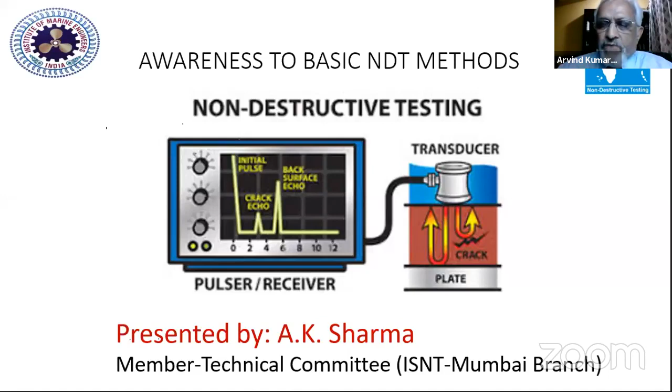As Mr. Jain pointed out, each subject in NDT is a very vast subject. Each method is vast, and everything cannot be covered in such a short time. But what I will be doing is briefly refreshing your minds with basic knowledge about each method, what is already known, and then mention what is generally followed in code as good practice. For each method, I have one slide which is very important, summarizing everything we should remember while inspecting an NDT component, or carrying out a survey or supervising NDT. So with this, I will first start off with the penetrant testing method.

Penetrant testing is the most ignored NDT method, where people think that it's very easy and anybody can perform it, and it's happening also in the industry. If you see, we just want to witness a PT, we don't care about who is doing it and how it is being done. But it is not really so easy. You have to follow certain critical steps, and if you don't follow those, you are likely to miss defects.

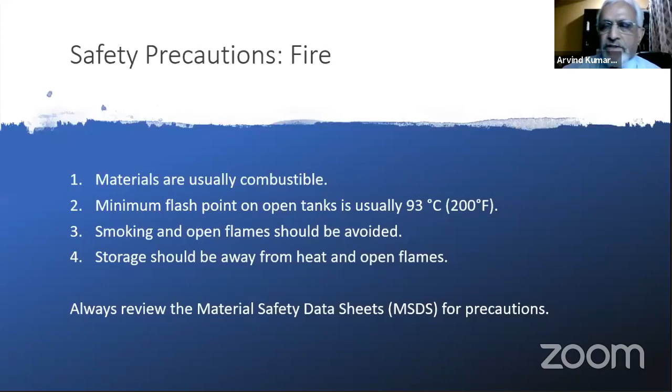Now, the penetrant testing materials which are used are mainly very combustible materials, and one needs to take care about their storage and handling, because if they are open to smoke and flames, they are likely to catch fire. So it is always better to review the material safety data sheets of the materials, and as a precautionary measure, follow all the instructions with respect to the storage and handling of these materials.

It has got a penetrant kit which contains a cleaner, a penetrant which is a dye, and a developer. This technique is normally applied to detect surface and subsurface defects, and the subsurface defect should be open to the surface. If it is not open to the surface, then you will not get any indication in penetrant testing. That is one of the things you have to keep in mind always.

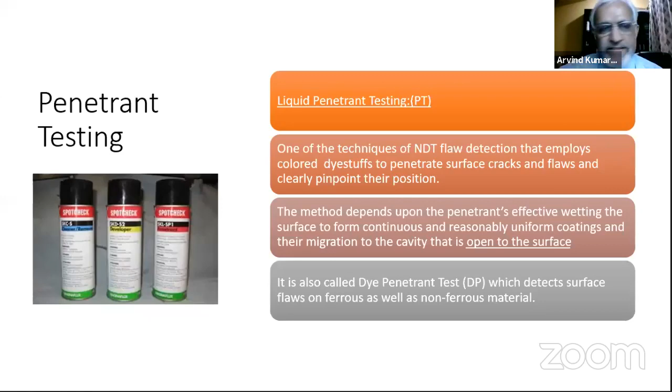This is also widely known as a dye penetrant test or a liquid penetrant test, but in ASNT terminology, we call it penetrant testing. Now it has got 5 basic steps, as you can see, and I will explain.

The first one is that we need to clean the surface. Cleaning has to be very, very proper to ensure that all the dust and oil and foreign material is removed, and the cavity which we are expecting to be a defect should be very clean.

After cleaning is done thoroughly, then you have to apply the dye, which we call the penetrant. This has to be applied using various methods, which we'll be seeing in other slides. Once the dye is applied, you have to hold for some time, what we call the penetrant dwell time. Dwell time is the time where we allow that dye to enter the surface of the cavity or crack or whatever defect we expect.

Once it has entered the entire cavity, we remove the excess penetrant. The next step is removal of the excess penetrant which is there on the surface of the test you are conducting, whether weld or other surface. Again, this requires a bit of technique. Otherwise, if it's not done properly, there are chances you might remove the entire cavity's penetrant which has gone inside the material. If you do it rigorously over a longer period than required, you will be removing all the penetrant that was there in the defect.

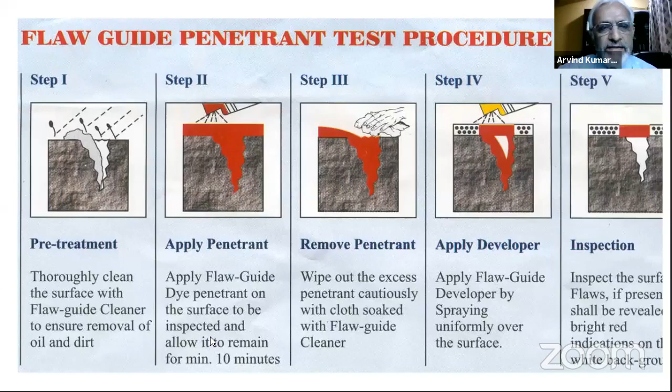So these are the basic 5 steps. Now we'll see a subsequent slide on what is important and what we tend to miss out in this.

Before we do that, we will see certain techniques that penetrant testing can be applied. One is the visible method, which is simple - we are not using any fluorescent lamp or anything to detect the indication. After the penetrant is applied, we check it with the naked eye, or once in a while a magnifying glass, not very high magnification, maybe 20x or so. That indication is called the visible solvent penetrant process.

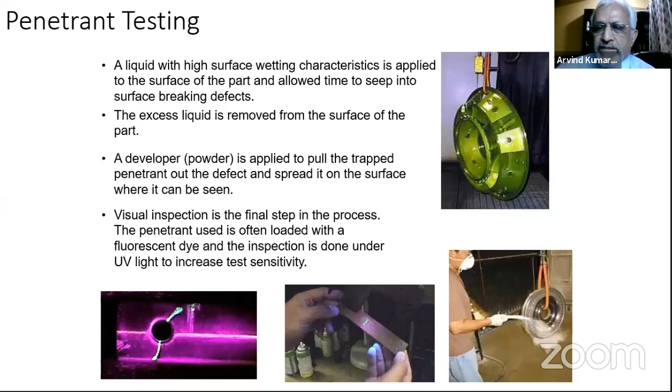Whereas the other one is fluorescent penetrant. What you see in this slide is a fluorescent technique where you have a penetrant which will have fluorescence, and the indication, if seen under UV light, will glow and fluoresce. This technique is generally applied on machined components and where sensitivity requirements are high, where you are expecting tight fatigue cracks and such defects. There we go for a more sensitive method, which is fluorescent dye penetrant testing.

So this we have seen now for penetrant testing what is required. We need to clean the surface, apply the penetrant, then the solvent, clean the excess penetrant and apply the developer and carry out the interpretation.

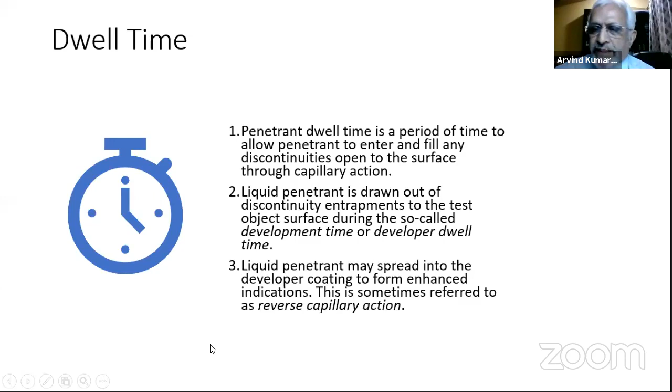Now dwell time is important - both penetrant dwell time as well as developer dwell time. Penetrant dwell time is generally for wrought materials specified as 10 minutes, but for other materials like castings it could be 5 minutes. For each material, section 5 gives you what dwell times are required, but generally it is 10 minutes and 5 minutes. For our application, most of the time it is 10 minutes. Similarly, dwell time of developer is also 10 minutes minimum, and then you can do the interpretation up to 1 hour as per section 5.

Now, as I was saying, you can apply the penetrant in a number of ways - by spraying. Spraying is generally what the kit I had shown in the previous slides uses; we have aerosol cans where you can spray the penetrant. Or it can also be applied by brushing, pouring, or dipping.

The important thing to understand is that whatever method or procedure we have followed as a documented and approved procedure, the same procedure we need to follow in subsequent tests that we do. If I have approved a procedure where spraying is used, then I should follow that only during my penetrant testing. If I change these variables, I have to prove again that what I'm doing is correct and I'm able to detect the defects I'm supposed to pick up.

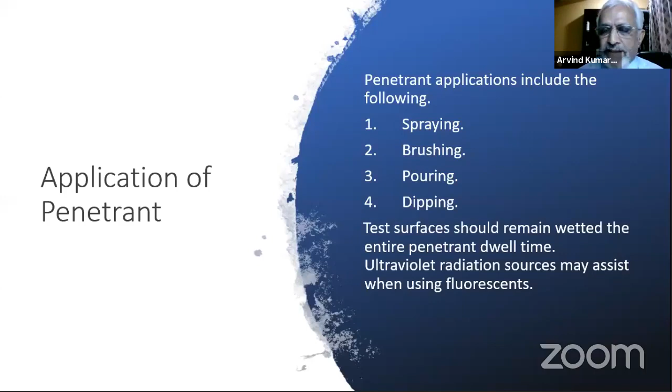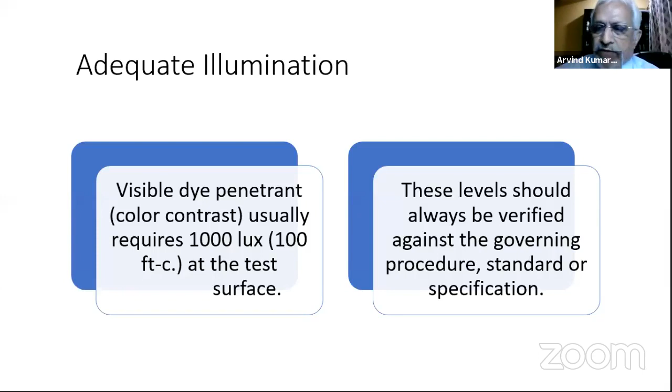Now for the fluorescent method, you need to have a UV light and the lux meter - or rather, a black light meter, which will measure the quantity of UV light intensity. When you're doing a fluorescent test, apart from 1000 microwatts per centimeter square UV light intensity, it is also important to make sure there is no leakage of white light from any of the darkened area that you have made for doing fluorescent MPI or fluorescent PT.

So leakage up to 20 lux is permitted as per the code. If the leakage of white light, that is normal light, is more, then you have to prevent and take care of that leakage light.

This is how you check. Generally, when doing a penetrant examination, you're supposed to measure 1000 lux. Now, everybody may not have a lux meter with them, so what the codes specify is that at least you should be able to once measure the intensity of the light you're having for carrying out the PT examination, and keep that as a record of measurement available with you at all times. If anybody suspects anytime, you have the measurement.

And how you do that is, suppose you have a say 30 watt or 40 watt bulb kept at a meter distance. There you hire a lux meter and check the intensity. If you're getting minimum 1000 lux, then you know that by using a 30 watt bulb at 1 meter distance, you're able to get the minimum lighting required. So you have it established in your file, and then you can carry out the PT examination accordingly - you don't have to use a lux meter every time.

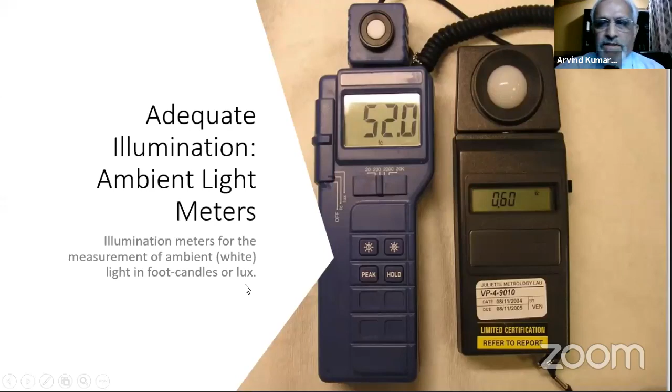So this is the meter which will check the white light intensity it will give. Now the interpretation and evaluation.

The interpretation is first you have to see what indications you have got, whether it is a relevant indication or a non-relevant indication. That means it is really coming from a defect, or it is coming from the process that you have not carried out properly. It is because of that.

So evaluation would be once you have established that yes, it is a relevant indication, then you have to evaluate it against your acceptance norms or whatever code you are following, whether that relevant indication is meeting your requirement or not. Most codes, at least for penetrant testing and magnetic particle testing, will not accept any linear indication. Rounded indications like porosities and all have acceptance given, say a 5 mm isolated spot can be accepted, and things like that. But linear indications in PT as well as MT are not acceptable.

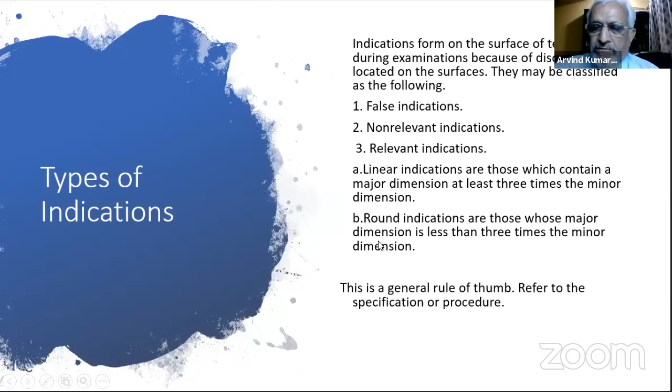As I said, there could be false indications, non-relevant and relevant indications. Many times false and non-relevant we put in one category only, like a non-relevant indication. And then we have relevant indications. We should also understand that a linear indication is one which has a longer dimension at least 3 times more than its shorter dimension. And a rounded indication is one which has a longer dimension less than 3 times the shorter dimension.

Now again, if you found a discontinuity, it could be a defect or it could not be a defect. You have to evaluate the discontinuity against an acceptance norm. If it is not meeting the service conditions for that particular application, then it becomes a defect. And if it is meeting the acceptance criteria, then we leave it as a discontinuity and accept it, or generally we are used to using the term defect only. So let's call it a defect which is acceptable and a defect which is not acceptable.

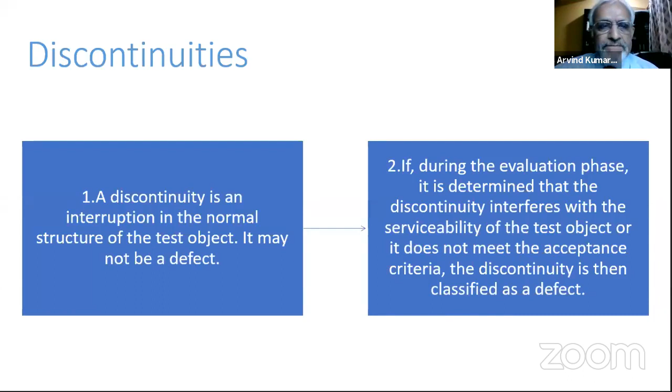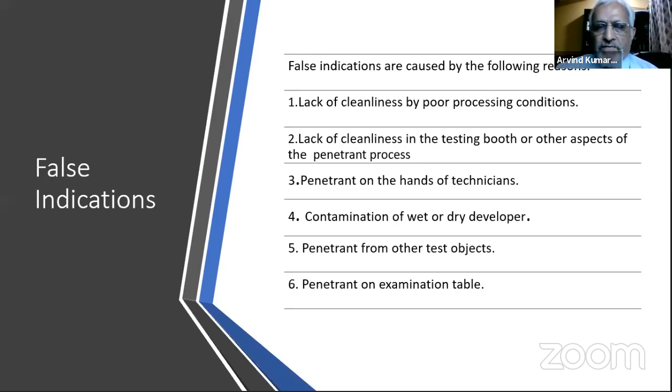The false indications can come because of various reasons. Some could be because the cleaning is not done properly. The cloth that you used is not lint free, it is having some threads and all, which will leave penetrant and give an indication later on when you apply a developer. Or the technician's hands were not clean, he has put his thumb impressions here and there. There could be various reasons for having a false or irrelevant indication. One should know about it so that during interpretation it becomes easy to make out whether it is a real indication or a false indication.

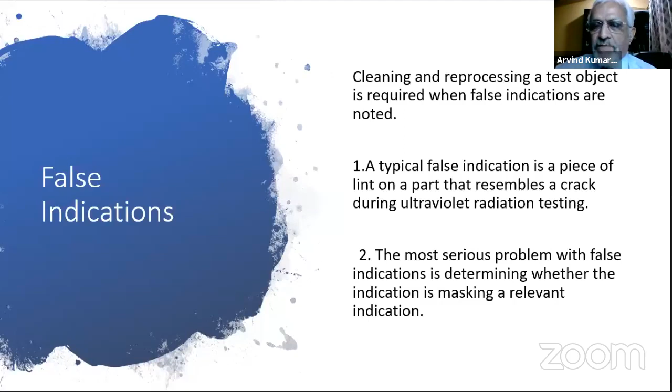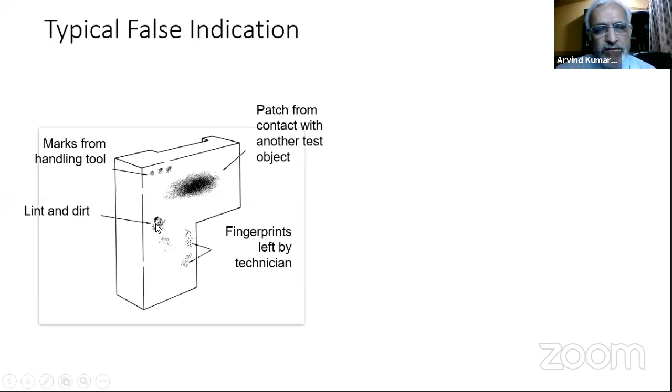Now, one thing we should see when it is a false indication is that it should not be masking the real relevant indication. If you have a false indication, fine, but it should not mask the relevant indication, otherwise you are going to miss it. Now, some indications which are false will appear like this, like tool marks, thumb impressions, patchwork, finger impressions, or an impression coming from a dirty cloth, something like that.

A non-relevant indication is really an indication which, if you're not aware of how the manufacturing of the component is done, you may interpret as a defect, but it is not - it is non-relevant. Like press fit parts will give you an indication where the press fitting is done, because it is not totally fused. Riveted connections and spot welds are some areas where you know there is going to be an indication which you should be able to interpret properly, that yes, this is not the defect I'm looking for. It is a part of the component that is giving an indication.

As I said, relevant indications are those which are caused by the discontinuities on the test object, and all relevant indications may be defects. Now, seeing some of the penetrant kits which are available, as I said, there are 3 sets - cleaners, penetrant and developer.

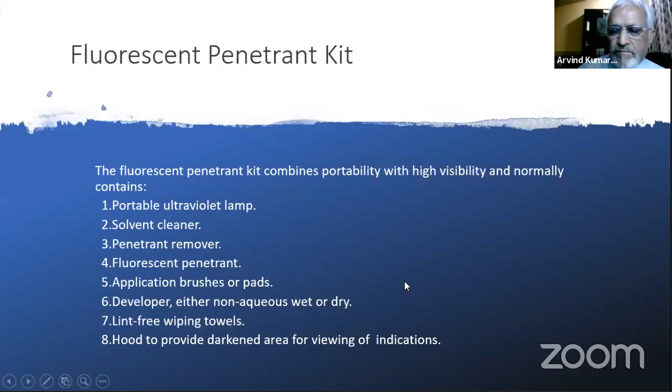For fluorescent, you have portable UV lamps, and again these 3 basic cleaners are there, and you have some tools, and you may have a lux meter, UV light meter, and a white light meter also for checking that there is no leakage.

Now, some advantages of penetrant testing. It's very easy to perform. We all know because it was the easiest method, and it detects the defects which are at the surface and close to the surface. As I said, internal or subsurface defects will be revealed only if the defect is open to the surface.

It uses inexpensive equipment, like 3 containers, which are not very expensive, maybe 200 to 250 rupees each, and we can perform the PT. Technicians can visually see the defects without any other equipment or highly skilled requirement to see the defect. Of course, skill is required to perform PT, and it can be used for raw material checks, in-service checks, and final examinations of materials and components.

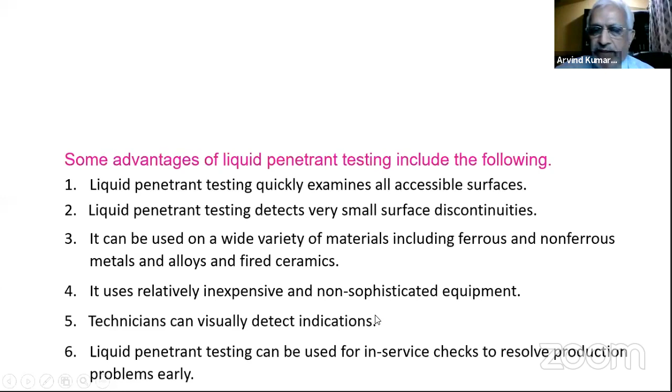As I said, the limitation is that all the defects should be open to the surface, then only it will be detected by PT. Otherwise, you will not be able to detect hidden or concealed defects.

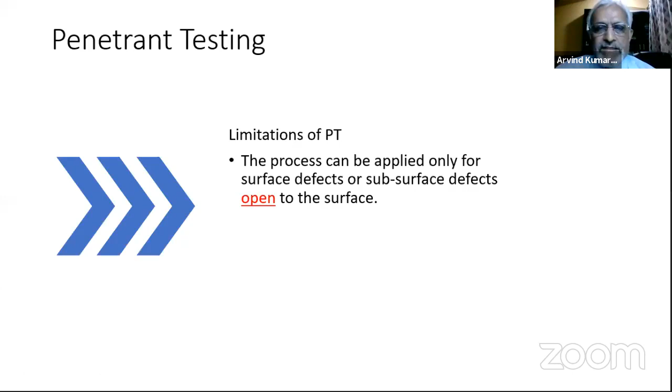The guidelines for all the NDT methods are given in ASME Section 5, which is a boiler and pressure vessel code. Section 5 has got various sections dealing with NDT, and various articles dealing with different NDT methods. Article 6 is for PT, which gives you the entire guidelines of how PT should be performed. Some of the requirements, like minimum lighting requirements, cleaning, and dwell times, are all given in Section 5, Article 6.

For the same ASME code, Section 8 Division 1 is for pressure vessels, and Appendix 8 gives acceptance criteria for PT. PT performed as per Article 6 of Section 5, the acceptance could be as per Section 8 Division 1, Appendix 8.

Of course, there are other acceptance standards also. I've just given an example which is most widely used. For valves and fittings, you have ASME B16.34, which talks about acceptance norms for PT, MT, RT, and UT. They have given in the appendix for castings, forgings, and all that.

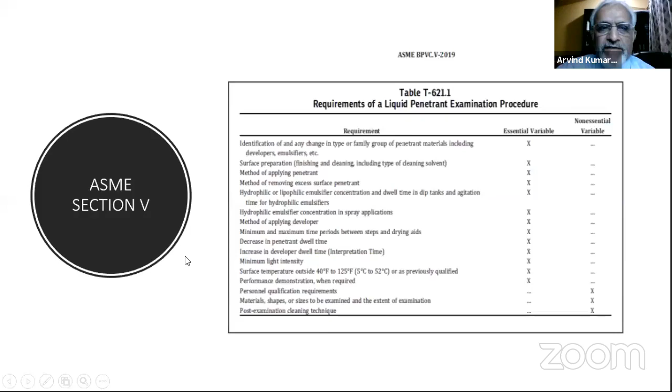Now, because this extract did not come very clear, for each method I have prepared the key points which we should remember while performing PT. It's a summary of all what we discussed, and the important things which we should not miss out during performance of PT are listed here.

Intermixing of penetrant materials of different manufacturers is not permitted. The code doesn't allow you to have a penetrant of one manufacturer and a developer of another, or to add a penetrant of another manufacturer to a leftover penetrant. These things are not permitted. It has to be of one manufacturer only.

The minimum light intensity, as I said, has to be 1000 lux for the visible method and 1000 microwatt per centimeter square for the fluorescent method. Now, other important things which did not appear in the slide but I mention here is the minimum and maximum time lapse between the steps.

This has to be established. For example, I do the cleaning of a surface before I apply a penetrant. Now, how much time should I give after cleaning before application of the penetrant? I cannot give unlimited time. If I clean the surface now and apply the penetrant after 2 hours, maybe my environment is such that in 2 hours I'm again spoiling my surface, and it may not be good for doing a penetrant test. So these things have to be established as a procedure, that if I allow half an hour time after cleaning, the surface doesn't get deteriorated, and I'm still able to pick up the indication.

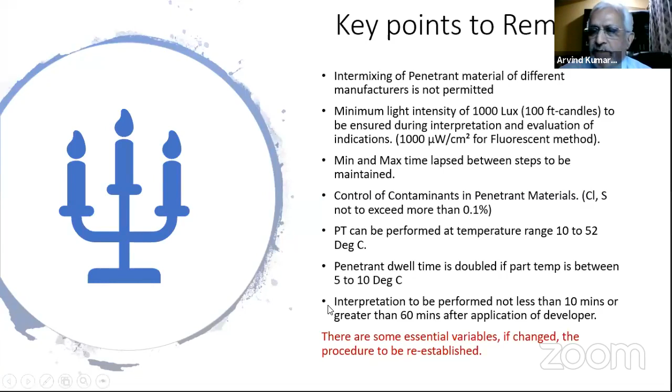These are the variables to consider. As mentioned, final interpretation has to be done not less than 10 minutes and not more than 60 minutes after application of the developer. So that covers penetrant testing.

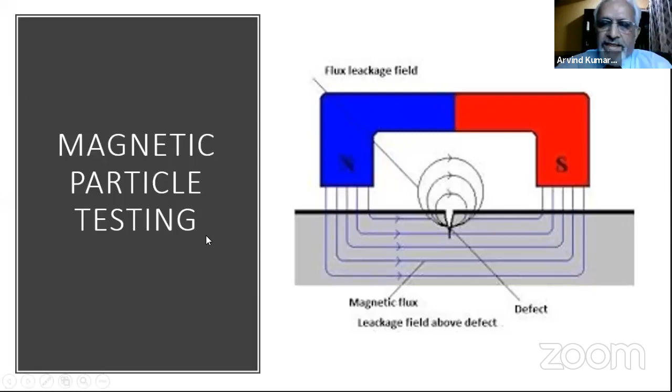Now we move to the next topic, magnetic particle testing. There are many aspects to this, but since we already understand magnetism and how materials can be magnetized, we won't go into too much detail there. Assuming we know these basics, we'll focus on discussing the more important and critical aspects of performing MT.

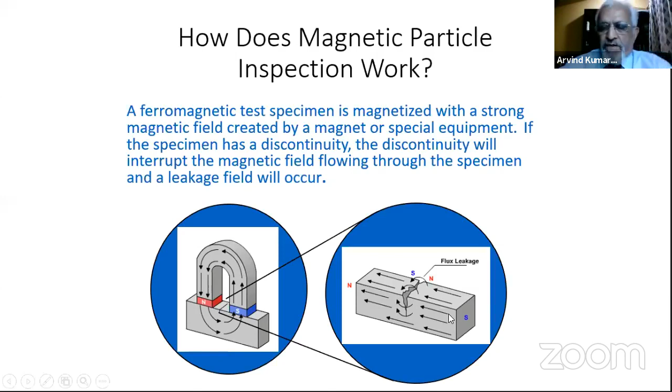When magnetizing a part, you can generate either a longitudinal magnetic field or a circular magnetic field. When there is a discontinuity, the flux introduced by magnetism will leak at points where there is a crack or opening, and the flux lines will jump over it. When you apply magnetic ink or dry powder, it gets attracted due to the changes in flux density that form there.

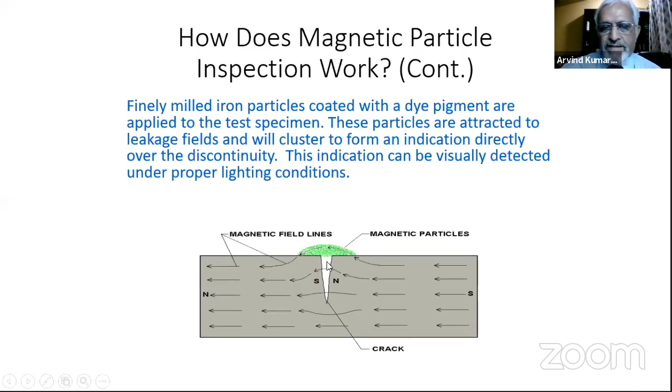Here you can see where there are no discontinuities or imperfections, the flux lines move smoothly. Where there is a leakage or cavity, the flux lines get concentrated. We'll see in the next slides how you can identify a defect this way.

So here too, you must first clean the part before doing MT. Then introduce the magnetic field — there are various ways and techniques to do this. Then apply the magnetic medium; again there are different methods, such as dry, wet, and fluorescent. Finally, interpret the indication that has formed.

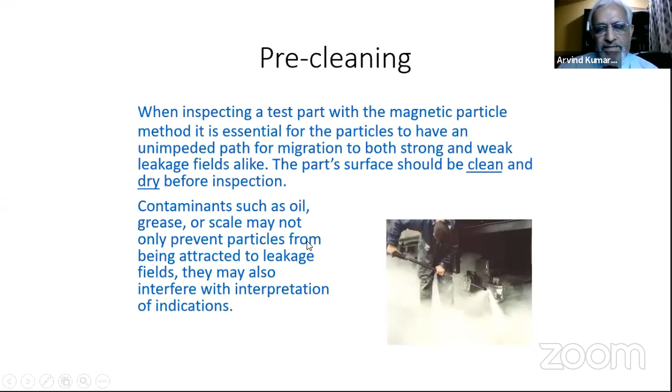While cleaning, you must ensure there are no contaminants. Oil and grease are the main culprits found in the area where testing is to be carried out, and you must ensure the surface is clear of grease, oil, and paint. Other contaminants can be wire brushed and removed, but oil and grease cannot.

You can perform MT using a permanent magnet, an AC/DC yoke, or by passing current through a conductor, and you also have coils to introduce magnetic fields. We will look at each one by one.

For all these methods, you can use dry particle or wet particle techniques, fluorescent or non-fluorescent methods, and continuous or residual methods. We already understand dry and wet, and fluorescent and non-fluorescent, as in PT. Now let's understand continuous and residual methods of magnetization — what each means and where to apply them. In most applications, we use only the continuous method.

Continuous method means that you are doing the interpretation while the magnetic field is on. You are magnetizing the part, you're not removing the magnetic field, and you apply the powders and see the indication being formed, and that is your interpretation. And after you have done that, then you remove the magnetic field.

That is called a continuous method. Whereas a residual method would be, the part is very hard material which can retain magnetism, and you are magnetizing that part. Now, because of retained magnetism, you may remove the magnetic field. After that also, there is a lot of amount of magnetism in the material, and you apply dry

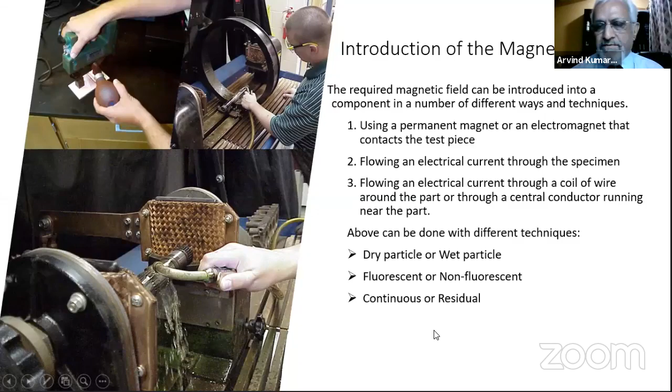So mostly you should ask for a continuous method of magnetization. And if somebody is doing residual, you have to be careful and make sure that the residual method is appropriately being done.

MT on a crankshaft, there are equipments where you have longitudinal as well as circular field generated in headshot method, they call it. This is one of those kinds of method where you magnetize the component through magnetic field, circular as well as longitudinal.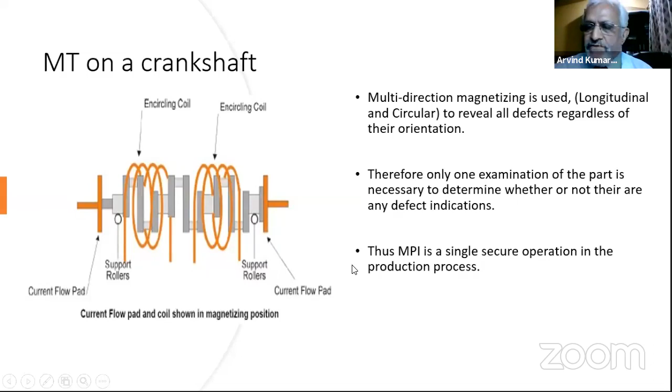Sorry, it's this one. You have current pads here, both the ends, which will generate a circular field, and then you have encircling coils, which will generate a longitudinal field. And in one set of magnetization, you can carry out the entire MPI, and all types of defects, whether they are longitudinal or transverse, you will be able to detect those.

Now, as you see, this is a longitudinal field, I would say, and this is a circular field. Now, if you have a defect which is parallel to this line, then it's not going to be detected. Even if it is up to 45 degrees to these lines, it would still form an indication. But if it is less than 45 degrees, tending towards parallel to these lines, it will not form an indication.

Here it is the other way. A longitudinal defect you will be able to see, but a circular defect you will not be able to see because it runs parallel to the magnetic flux. So these things you should know, which kind of method will generate what kind of field.

And that is why for each MPI I will show in the next where there is a yoke, you will have a better idea. Like here, for this field, you will see a longitudinal defect, and this type of defect, which is across the circumference, will not be picked up in this.

Now this is again generating a longitudinal field because an encircling coil is there, and the field will be like this, and you can find out defects which are transverse to this field.

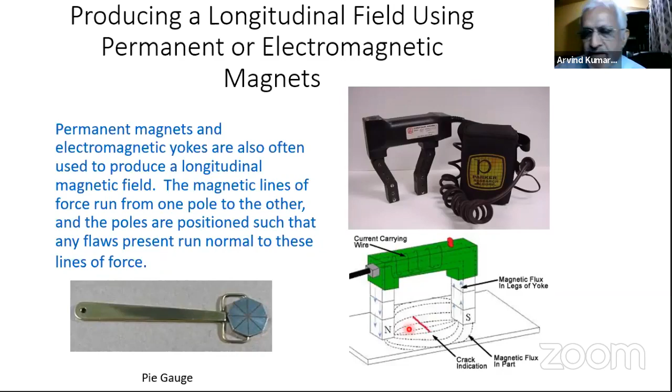Once you have magnetized, you introduce this into the magnetic field, and you see these lines that tend to look like crack-like things. It should be upside down, and from the upper surface, after it is magnetized, you put dry powder or wet powder—generally dry powder—and you will see these lines appearing on the other side of the pie gauge. That means the field strength is adequate and it's picking up these indications, so it may pick up the defect indication also.

Circular magnetization: when you pass current through the conductor, you develop a circular field. This is again a headshot method where you're doing MPI. Various combinations are there, but you should know what you're using so that you're able to pick up all the defects. If you're introducing a longitudinal field, you have to rotate the part by 90 degrees and carry out the test again so you're able to pick up the transverse defects too.

Wet particle methods also can be used, same idea. Generally for dry methods, you must have seen the NDT operator, if working on a weld, will first put a white coat, and then over that magnetize and apply colored particles, either red or gray, mixed in a medium. Where there is an indication, with good contrast you will get white and red contrast, and you will be able to pick up the indication.

That paint is hardly about 15-20 microns, so you shouldn't worry about doing MPI over it. Of course, if there is a painted surface, you should generally not do MPI directly, because that requires demonstration. If the paint is up to 50-60 microns, no problem. If the paint is thicker, you have to take a mock-up piece with the same paint surface or an artificial defect, see that the defect is picked up under the paint, and then you can do the entire painted surface.

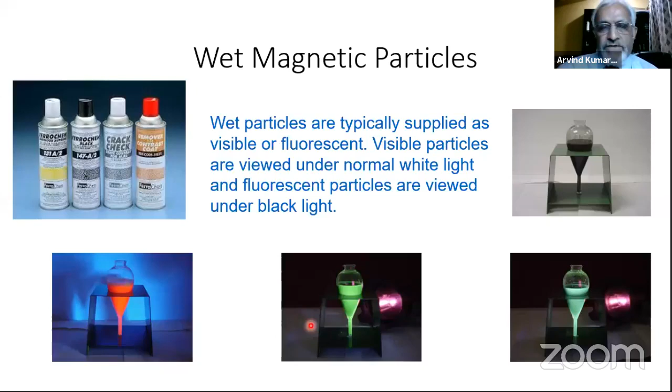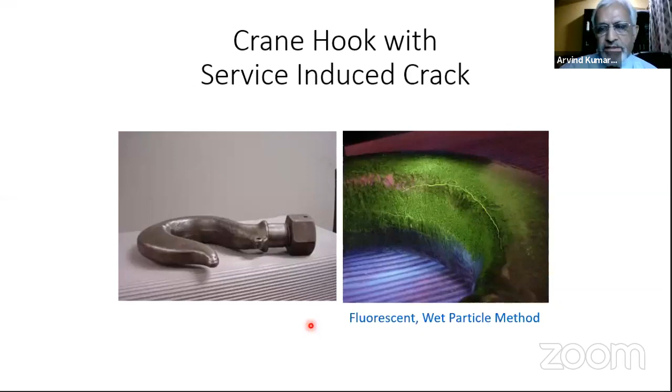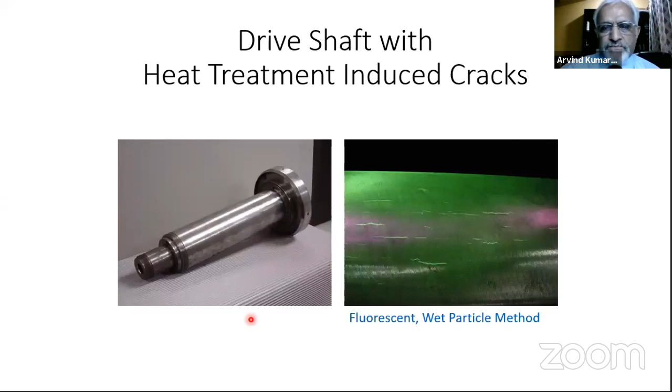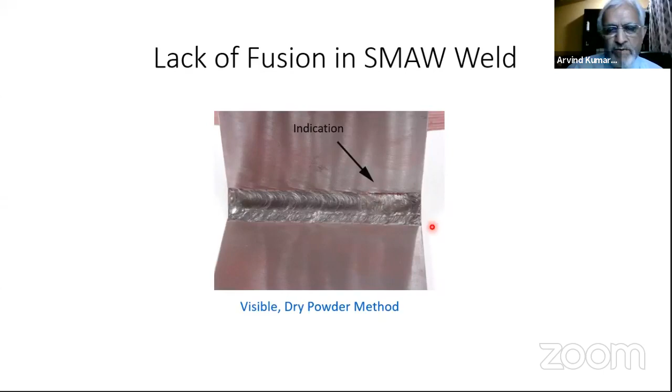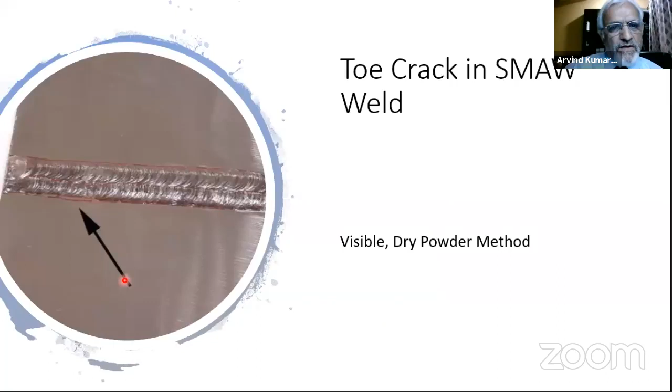On the weld, on the edges, you can see there is lack of fusion in a SMAW weld—this is manual welding. Here also you can see there is a toe crack, and there are some undercuts also on this other side. Again, there are cracks at the throat and toe of the weld.

Now, you may require demagnetizing a part after the test has been done. Not always, but certain applications require demagnetization—if your subsequent operation is likely to be affected by the magnetic field, you have to demagnetize, bringing the part back to its original condition by removing the entire magnetic field. Generally, after demagnetization, in pipelines a strength of up to 25 Gauss is acceptable. But if you don't know how much to accept, restrict it to about 5 Gauss and then demagnetize.

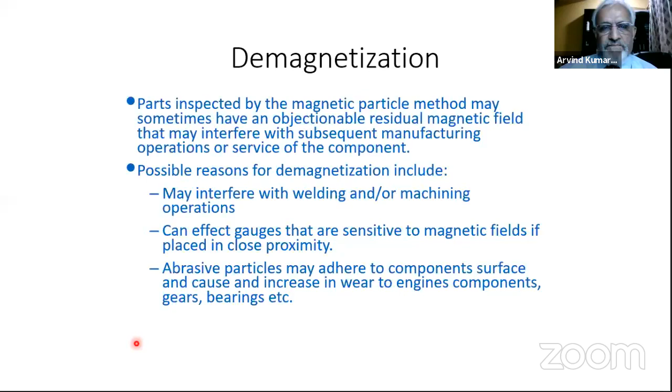For AC currents, demagnetization is not required, because the AC current itself will demagnetize the part. But here people claim this is a method where surface crack detection is no problem, and AC current is the best you can use for surface crack detection.

When you have to detect indications or cracks which are subsurface, there are two things. One, you have to demonstrate how much depth your system is going to pick up. Another thing is you have to use half-wave DC current. Neither AC nor a pure DC current will work. You have to use half-wave DC current, which gives a little mobility to the particles after magnetization, and that mobility will increase the sensitivity, allowing them to penetrate the surface and form an indication.

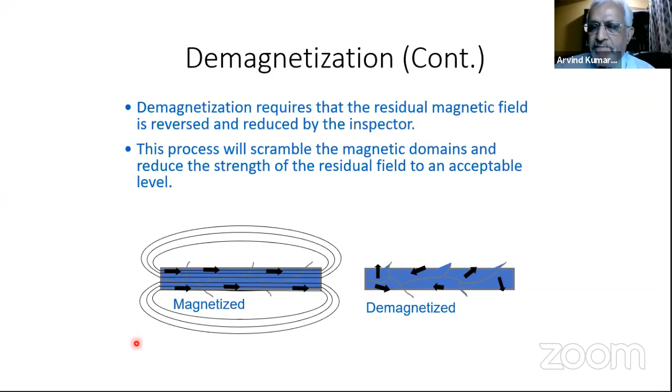For any MPI, people claim their equipment is able to detect 6 mm or 4 mm below the surface. These are all claims. Let them demonstrate that they're able to pick up 6 mm. Once demonstration is done, then you have more confidence that the system is going to work.

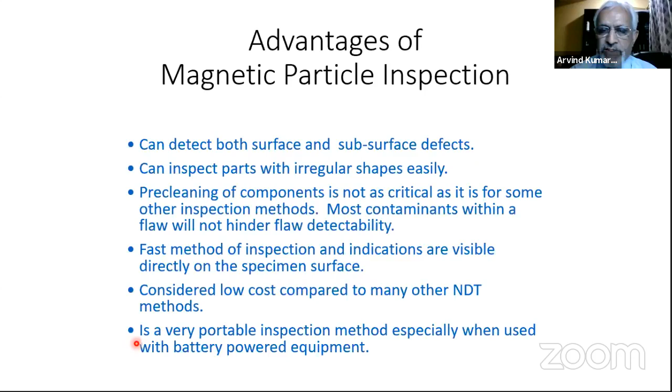What are the advantages? We can detect surface as well as subsurface defects, which may or may not be open to the surface, unlike PT. It can detect all types of defects irregular in shape, and pre-cleaning and the whole process is not very difficult to follow. It's a fast method for inspection, and indications are visible directly on the specimen being tested. Very low cost compared to other methods like radiography and ultrasonic testing. It's a very portable inspection method, especially when used with battery powered equipment.

Limitations: you cannot detect on non-ferrous materials. Materials which you cannot magnetize, you cannot test using MPI. The most common material we use is stainless steel, where we are restricted for this technique because you cannot magnetize stainless steel. Similarly aluminum also. Inspection of large parts may require equipment with special power requirements, which could be a limitation again.

With a coated surface, you cannot do MPI unless you demonstrate that the process is working. Otherwise, you have to remove the paint. Sensitivity has to be established. People claim 6 mm below the surface you can do MPI, but unless it is demonstrated, it is difficult to accept. Post-cleaning demagnetization is many times required, which is an additional step that needs to be followed.

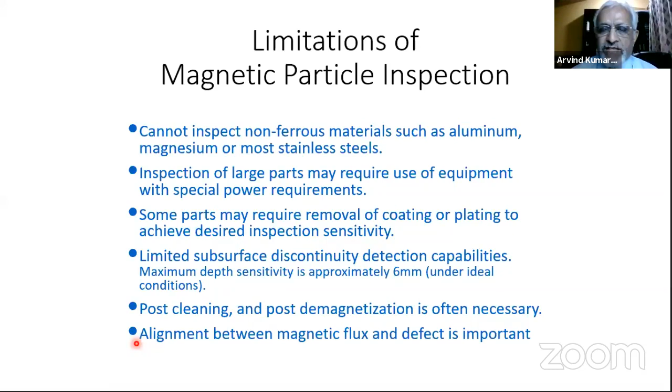Alignment between the magnetic flux and defect is important. That means how you magnetize - whether you are looking for a transverse defect, you have to introduce a longitudinal field, and vice versa. Going a little further, what important things are there? What is my magnetizing technique? How do I prepare my surface? These are all essential things we should follow, and once established, we follow the same technique.

Method of magnetizing the part, whether it is by yoke. The AC yoke will have a lifting power of 4.5 kgs. You have to demonstrate this using calibrated weight - if it's able to lift 4.5 kg, it is having good strength to be operated as an AC yoke. Similarly for DC, it is 18 kg. It has to lift 18 kg at the maximum pole spacing, then it is having good strength.

Minimum lighting for visible is 1000 lux, and for fluorescent 1000 microwatt per centimeter square. MT on coated surface demonstration is recommended. You should not proceed without actually doing a demonstration.

Examination of the parts: generally dry particles you can use up to 316 degrees centigrade, because they are basically metallic iron particles, so you can use high temperatures. Whereas wet particles are generally recommended up to 52 degrees centigrade, because they are in a liquid which is volatile, and sometimes kerosene and similar substances are used. We have to make sure we restrict the temperature as recommended by the manufacturer for the wet particle method, but definitely not advisable to go beyond 52 degrees.

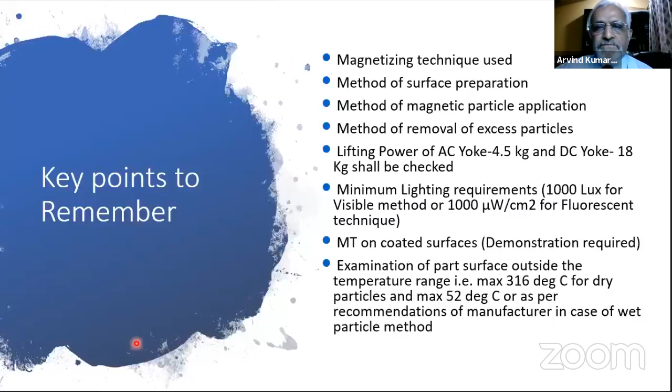So that was MT, and the next topic we have is radiography testing. The previous two methods, PT and MT, many times we categorize defects as surface, subsurface, and internal. The previous methods we have seen are used for detecting surface and subsurface defects. Now, the next two methods we are going to see, radiography testing and ultrasonic testing, are more importantly used for detecting internal defects.

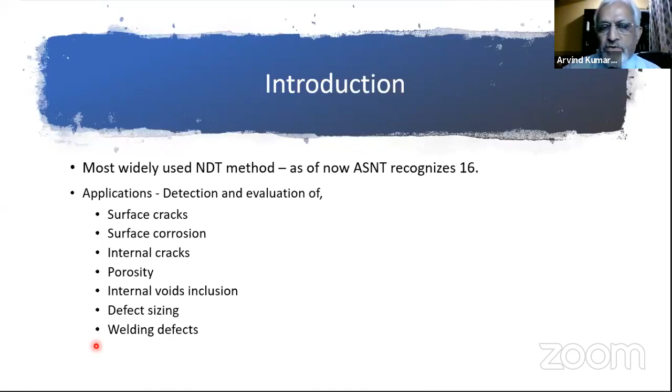Now here we can detect all kinds of defects which are there in the welds. Even though the intention is not to see surface corrosion, if at all there is something, it can be detected. Then you have surface cracks or internal cracks, porosities, lack of fusion, and all these kinds of welding defects can be detected by the radiography method. Now in comparison to UT, it is easier to detect three-dimensional defects in radiography, and two-dimensional defects are difficult to catch in radiography. Like very tight cracks, you may miss it in radiography, whereas you may not miss it in ultrasonics.

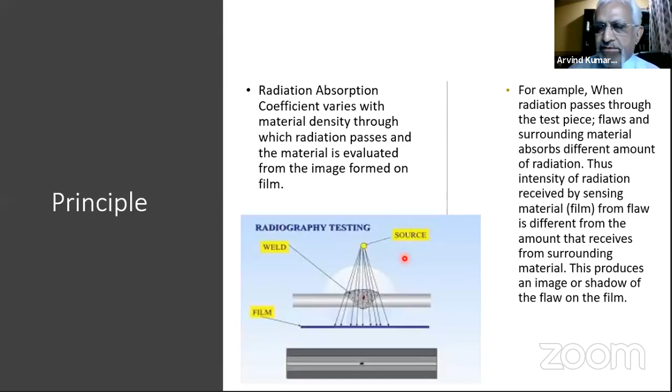So, as I said, there is X-ray. In X-ray, you are artificially producing X-rays in a cathode ray tube where you have an anode which is giving a high intensity, and electrons which are suddenly losing their velocities by having a filament, and that makes a generation of X-rays. X-rays are recommended for use up to certain thicknesses, for low thickness, for a higher sensitivity point of view. For high thickness, you have other methods available, so you don't use X-rays. You will be using gamma radiography. We'll see further how it is.

We have X-rays and gamma rays. The gamma rays are naturally occurring radioactive sources, which keep radiating all the time. You have no control. Like today I have, say, a iridium-192 source of some strength, say 20 curies. After some time, it is continuously radiating, whether you use it or not, it is radiating, and the strength keeps on reducing. Each source has got a half-life, we'll see what that is. Unlike that, you have an X-ray equipment where you generate X-rays. When you turn on the machine, these X-rays are generated. When you turn the machine off, the X-rays are not generated, and they are quite safe. Unlike gamma radiography, where there is nothing like on or off—you have an X-ray camera, gamma ray camera—you are exposed to the radiation if you don't take care.

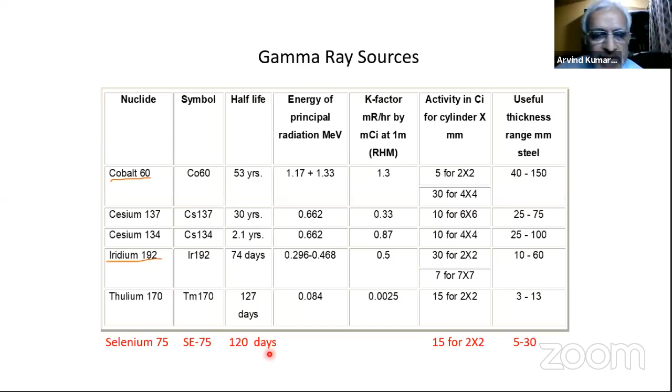So this is the option we go for when doing an X-ray of 10mm and below. Up to 5 to 10mm, this is the best source to carry out the X-ray.

Now, some difference between X-ray and gamma ray. I will not go into too much detail, but with X-ray we can control exposure - we are not totally exposed to the radiation all the time, whereas with gamma rays, you are exposed all the time. X-ray gives high contrast and good definition, whereas gamma radiography gives slightly inferior sensitivity. The source focal spot is the governing factor - the smaller the focal spot, the better the X-ray and sensitivity you are going to get.

X-ray focal spot is small compared to gamma radiography. That's why it gives good contrast and other benefits.

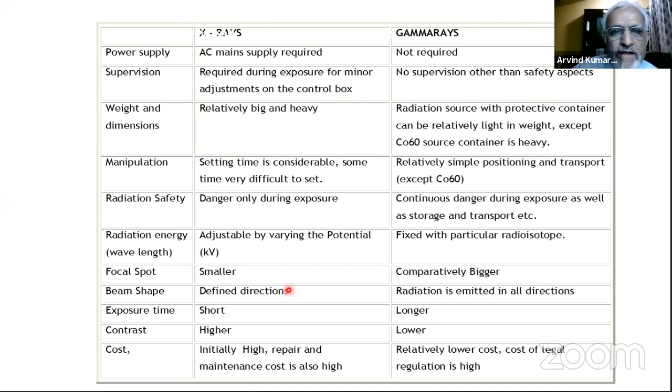Other factor is the film. The type of film you use makes a difference to the final sensitivity you get. If there are issues getting required sensitivity for materials with less thickness, it is advised to go for D4 or D5 films. D2 will not be practical because exposure times become very high. But D4, definitely you will have to go for.

If you have to do gamma radiography of say 3mm, 4mm, 5mm stainless steel, cupronickel, or aluminum, you have to go for D4 films with Selenium-75 source. And if you still don't get the required sensitivity, you have no choice but to go for X-ray.

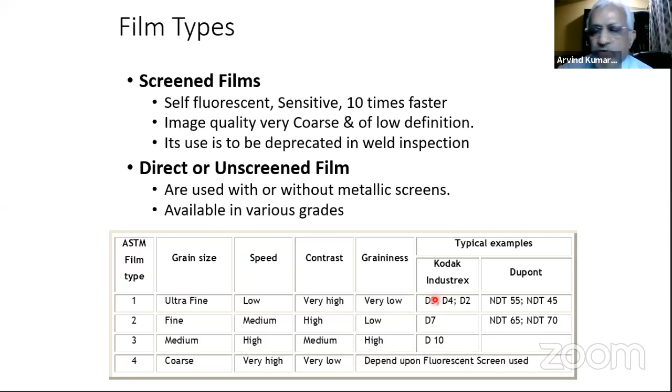Coming to image quality indicators, there are two types. For welds, the widely used one is the wire type, which you'll see. And for castings, people use a hole type penetrameter also.

Now don't go by these images - they are only to identify different materials, different notches are there. So consider it only on this basis.

For hole type, you have some thickness of the penetrameter based on the designation given - almost 12 thou or 15 thou, meaning 12 thousandths or 15 thousandths of an inch. That is the thickness of the penetrameter. Over that you have either 1T (1 thickness diameter hole), 2T, or 4T diameter hole, all arranged in this fashion. The smallest hole is in between, the next one is towards the end, and the bigger one is towards this end.

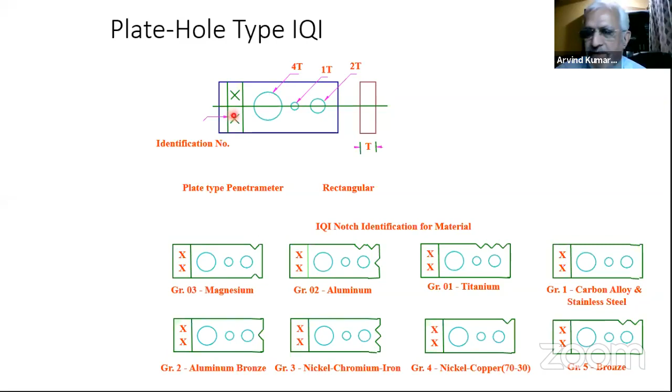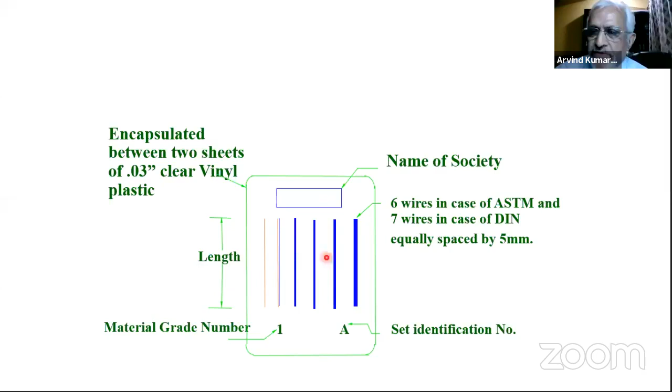Whereas in wire type, you have ASTM wire type with 6 wires, and there are 4 sets like this - Set A, Set B, Set C, and Set D. Each set has a different range of thickness of wires. So for welds, we generally use these ASTM penetrameters to check the sensitivity of the film. The IQI is only used to check the quality of the radiograph, not the size of the defect.

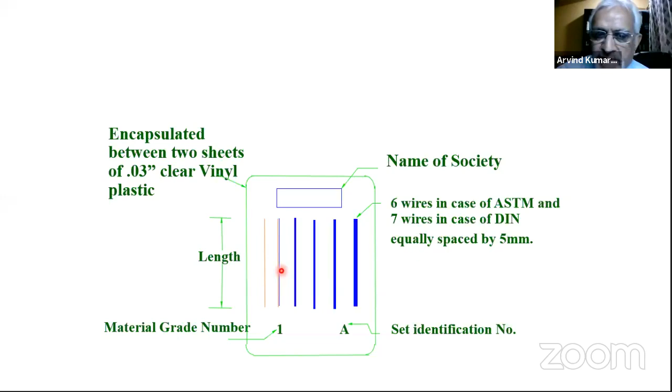How to check that - sensitivity for wire type has a very simple formula given: diameter of the smallest wire that I am able to see in the radiograph. Suppose out of this, I am able to see this wire but not this one - so this is the smallest wire I am able to see. So that smallest wire, and what is the thickness of my job?

Suppose I am able to see a 0.2mm wire on a 10mm thick job, into 100, divided by 10 - so I get 2% sensitivity. Generally, ideally 2% is the acceptable norm.

But now the codes have become more practical, because in lower thickness 2% is difficult to achieve, while in higher thickness 2% is easy to achieve. So they made a table where it doesn't talk about 2% or 4%, it says for this thickness, this wire should be visible straight away. For lesser thickness they accept up to 3.5% sensitivity since it's difficult to achieve, and for higher thicknesses you can go for even 1.5% and 1.8%.

For hole types, the formula used is 100 divided by x, under root of th by 2, where th is the thickness of the penetrameter and hole diameter, and this is the job thickness.

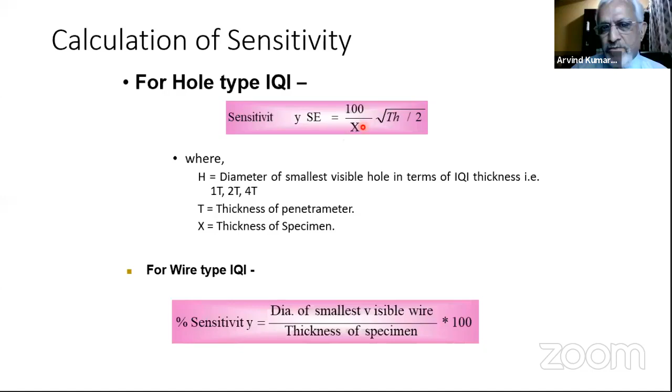Coming to the techniques, let's see what happens when doing an X-ray radiograph, either X-ray or gamma ray. I generally use the term X-ray, but technically X-ray means it's produced in a CRT, an X-ray tube. But I am generally using the term X-ray to define both X-ray and gamma ray.

So we have one simple technique where if you're carrying out X-ray or radiography on a plate, like a hull plate which is long, you have to use the technique called single wall single image. Single wall means the radiation penetrates through one wall, and what you're getting is one image - that's why we call it single wall, single image. This is the kind of thing you will see on the radiograph.

This is the IQI, the image quality indicator. You can see this is an X-ray, and you're able to see all the 6 or 7 wires which are available. Based on what is the thickness of the last wire and what is my job thickness, I can calculate what sensitivity I've got.

With respect to procedure qualification, the code for others has different ways to qualify a procedure, but for radiography it's very simple. There are many varying factors, but if I've produced a radiograph giving good density and sensitivity, that indicates the procedure has been correctly followed. So what I need is a good density and sensitivity.

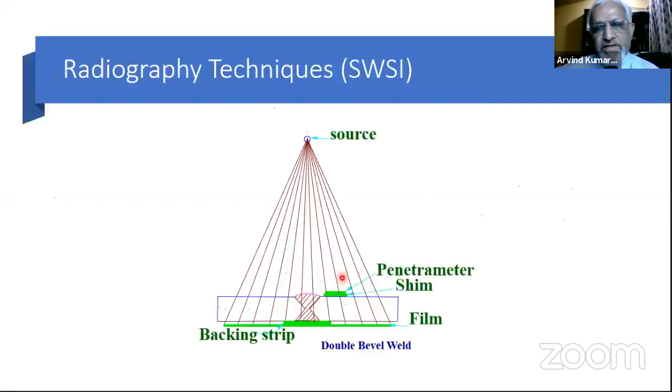Then another technique is called the panoramic technique. This is used for big size pipes, like a 20-inch pipe or even bigger, 64-inch pipe or larger diameters, where you place the source in the center of the pipe where you have a weld, then place the film outside all around, and with a single exposure the entire circumference of the weld gets exposed. So that's called a panoramic technique.

Then you have a double wall double image. Some of you must have seen an elliptical shot. We call it elliptical because the weld appears like an ellipse. This technique is applied only on pipes less than 3-inch diameter: 3 inches, 2.5 inch, 2 inch, 1.5 inch, even 1/2 inch and 3/4 inch. It's a bit difficult and people go for other methods, but yes, it's possible.

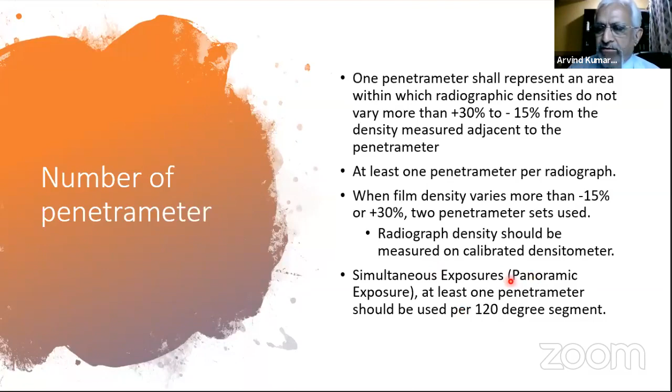Before you do the interpretation of the film, what is required to be seen is first, whether the film has been taken properly, whether the X-ray has been taken properly or not, and that it is not having anything objectionable. Once you find it is okay, then you have to see the area of interest, whether that has a proper defect-free image or not.

There could be defects introduced because of processing, which you have to be careful about. The weld area of interest should not have watermarks, bending of the film, or excess darkness because of processing. Also fog, which is light leakage - white light has leaked and it has become very dark on certain areas. So these things you have to see first.

Also check that your density is okay. Since we're talking about the ASME code, for gamma radiography, density required is 2 to 4 - you can accept minimum 2 and maximum 4. Whereas for X-ray, you can accept 1.8 to 4. X-ray you can go slightly on the lower side also, which gives better sensitivity. So 1.8 to 4 is acceptable.

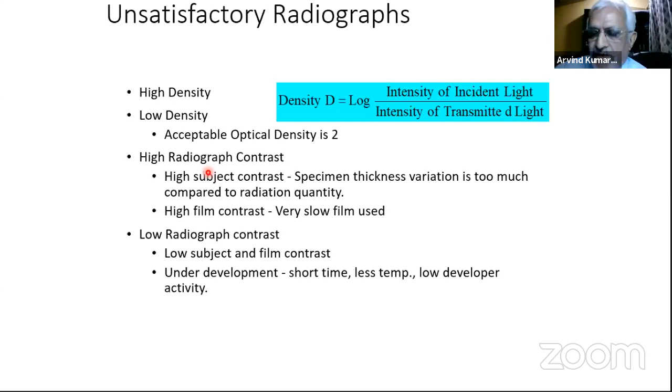Then check the contrast is okay or not, density, sensitivity - everything okay. Then you start the interpretation for looking for defects. So there are two things to be seen before you actually start evaluating a radiograph: one, whether it has any process mark or spurious indications masking the defect area of interest; other, that proper exposure times, density and sensitivity are achieved for that particular technique and thickness of the job being radiographed. Once that meets the requirement, you can evaluate the radiograph as per the code you're following.

Important things to remember: examination is to be performed as per a written procedure. This goes without saying for any technique - we'll talk about this at the end also. It requires a written procedure approved by a Level 3, which should be followed for doing any NDT.

The previous code for radiography, Section 5, was not giving a mandatory requirement for a procedure for radiography. It assumed that when density and sensitivity were okay, the procedure had been correctly followed. But now in the new revision, they have indicated that for radiography also, a written procedure should be there, covering minimum material type and thickness range. If the procedure doesn't talk about thickness range, I could use a gamma ray for 100 mm thickness also, which is not permitted. Gamma ray generally is from 10 mm to 65 mm, the right range where you can do gamma radiography.

With iridium 192 or cobalt, you can go up to 5 inches also. So if the thickness range is not mentioned, you're not able to decide whether your procedure is going to work well or not. The procedure should also specify whether you are using X-ray or gamma radiography, source to object distance, distance from source to film, size of the source, sensitivity and density of the radiograph required, the film brand and designation - for example NDT 65 ultrafine film or which type of film is used - and the screens used to protect against backscatter and other things.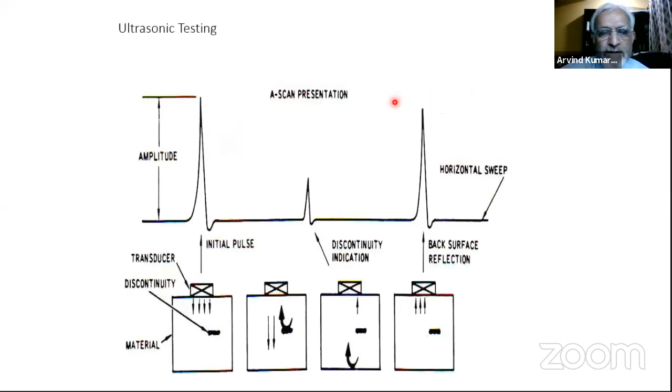So this explains how the waves interact with the defect. Now, how to do the calibration using a single crystal probe, not a TR probe.

If I want to have a range of 50 mm using the same thick block, what I need to do is take the second echo — this is 25 and this is 50 — and turn the delay knob to bring it onto the full range. So my entire range will become 0 to 50. This is how calibration is done using a single crystal normal probe.

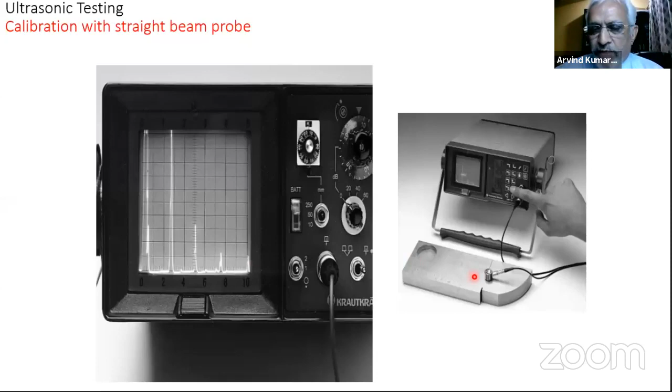So here we were using what's called multiple echoes for doing calibration — for a 100 mm range, we set 4 multiple echoes and got a 100 mm range. The same thing cannot be done here because with multiple echoes, there would be error since the beam is going at an angle, not straight, so this results in an error.

So to calibrate this TR probe, suppose I want a range of say 10 mm, I have to always use 2 thicknesses. In this case, I'm using a step edge block where each step is 1 mm — say 3 mm here and 6 mm here. I keep the probe on 3 mm and see whether I'm getting a 3 mm reading, then put the probe on 6 mm and check that I'm getting 6 mm. You may require adjustments once or twice to make sure 3 mm shows 3 and 6 mm shows 6.

Once this is done, you have a proper range of up to 10 mm. If you want a range of 20 mm or say 50 mm, you have to use 2 intermediate thicknesses and do the calibration using those 2 thicknesses. If you do calibration using multiple echoes in this case, then there would be thickness variation error.

For critical jobs, I've seen people doing this where, for pressure vessel in-service inspection, they check using multiple echoes, and the tolerances are so tight that if your error itself is quite high, then instead of accepting a vessel for another 20 years, you might end up rejecting it after 10 years, saying there is a lot of loss of thickness, so it is not acceptable.

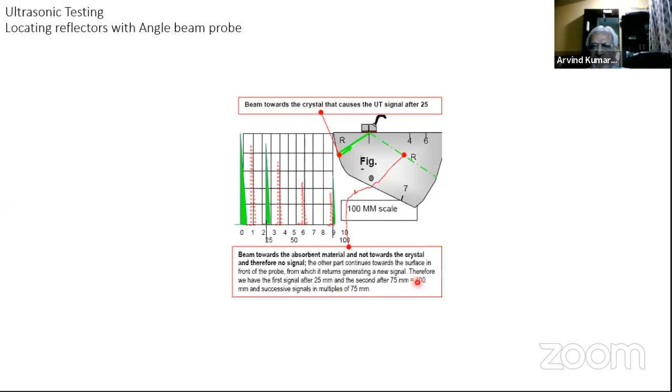Now for weld scanning - we have already seen thickness checking. For thickness checking, you require only a normal beam probe. Even for lamination testing, you use only a normal beam probe, and we have seen how to calibrate. For lamination checking, sometimes they calibrate on the job itself by taking a back reflection from the plate.

But if you have to do a weld scanning, then you have to plot what is called a DAC, distance amplitude correction. The distance amplitude correction curve has to be plotted, and it's plotted by having an artificial defect on a plate - drilled holes.

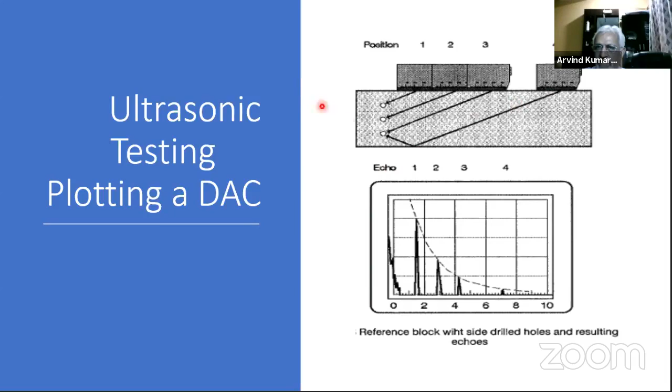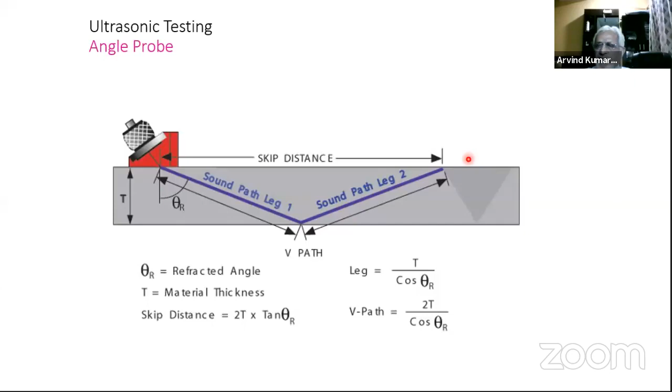Once that is set, now I just have to do scanning. If I put the probe here, I get the indication from the root. If I put the probe here, I get the indication after a bounce and reach the surface - it's like this. So if I scan between this, I'm scanning the root as well as the top surface, meaning I'm scanning the entire volume of the weld.

Now the good practice is, if it's a butt weld accessible from both sides, you have to do the scanning from both sides. Although with one side I'm able to cover the entire weld, since the surface is available, we don't know the orientation of the defect and all that. So it's better to check from the other surface also in a similar fashion.

Now, what are the other things to look into? Once I've plotted this DAC, I note down what amplitude is shown on my UT machine - suppose it's 38 decibels, I note that as 38 decibels. Scanning has to always be done 6 decibels more than that, which we call double sensitivity.

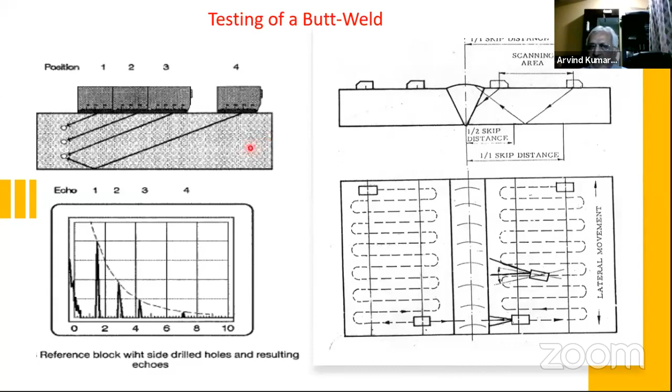But before that, you'll realize I'm doing calibration on this job, which is a machined plate having machined holes, and the surface is really very good. Whereas when I do testing on the actual job, my surface may not be as good as this - it will be rough, sometimes rusted, and won't transmit as well as I get here. So there is a correction factor called transfer correction. When I transfer the probe from this surface to that surface, how much difference in amplitude do I get - that's called transfer correction. I have to note that and add it into my DAC, whatever 2 dB or 3 dB extra I'm getting, to take care of the difference in the surfaces - this being a smooth surface, that being a rough surface.

The calculations of surface distance: sine theta into sound beam path. Sound beam path is what the sound travels inside the beam before hitting a defect, that is the total travel we call sound beam. Depth is found using cos theta and sound beam path, measured from the top surface. If it is a direct hit, depth is as calculated; if it is after a bounce, you have to remove one thickness from that.

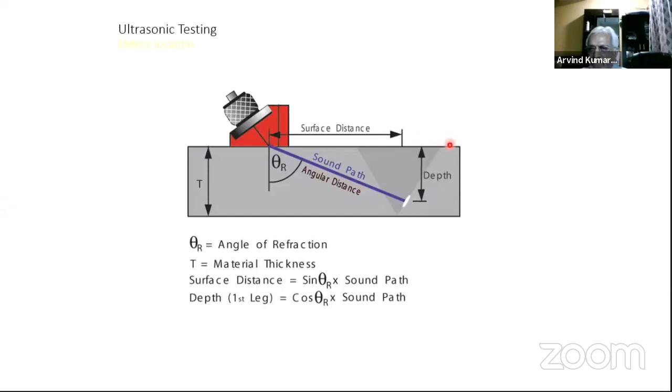These are some of the scanning patterns. What we need to do is cover the entire thing, so we scan from half skip. Half skip is where I get an indication from the root, to full skip, where I get an indication from the surface, and go a little beyond that to cover the reinforcement also.

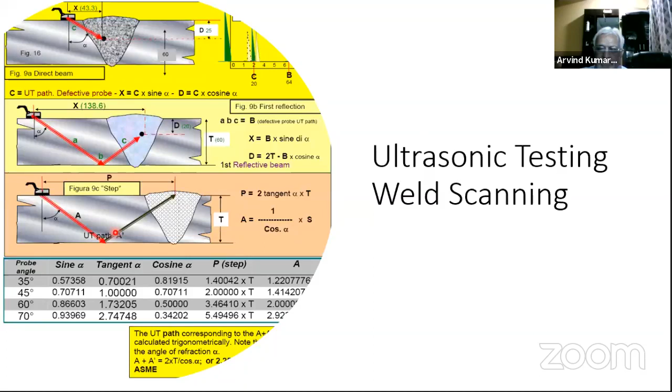Now, what are the advantages of ultrasonic testing? You can check internal flaws. People are more confident in radiography because they are able to see the film, and they have less confidence in ultrasonic testing because they think it is more dependent on the skill of the operator, and we are not able to monitor how skilled he is, so the confidence level goes down.

But from a technique point of view, radiography shows defects which are not so critical, but you are able to see them well. UT shows defects which are very critical from a service point of view, like lack of sidewall fusion, which you will not detect in radiography but can easily detect in ultrasonic testing. Even tight cracks, which you may miss in radiography, you will pick up in ultrasonic testing. So always give more confidence and reliance on ultrasonic testing with respect to radiography. Only thing is what needs to be controlled, which we'll see later, so that we have more confidence.

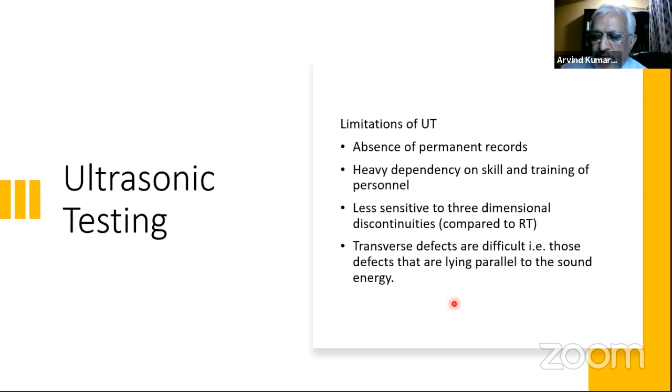Transverse defects are difficult to detect. Defects lying parallel to the sound energy are also hard to pick up, because the defect has to be perpendicular to the sound beam to have the best amplitude. If it is parallel, you will not be able to pick it up.

Applicable codes for this: you have 317, which is for checking the equipment characteristics, whether the equipment is okay or not, the vertical linearity and the horizontal linearity. We can check using this 317.

I've added one more code for lamination checking. Normally we have ASTM A435 and A578. In 578, there are level A, level B, level C. Based on the criticality, you decide on these levels.

Generally we use 578 level B. Then you have Section 5, Article 4 and 5. Article 4 is for welds and Article 5 is for materials. UT of welds guidelines are given in 4, UT of materials is given in 5. Acceptance standard is given in Section 8, Division 1, Appendix 12 for UT.

Then you have guidelines given in ASTM 388 for testing forgings. Then for valves, as I was telling earlier, ASME B16.34, Appendix 1, 2, 3, and 4, each giving acceptance norms for PT, MT, UT, and RT.

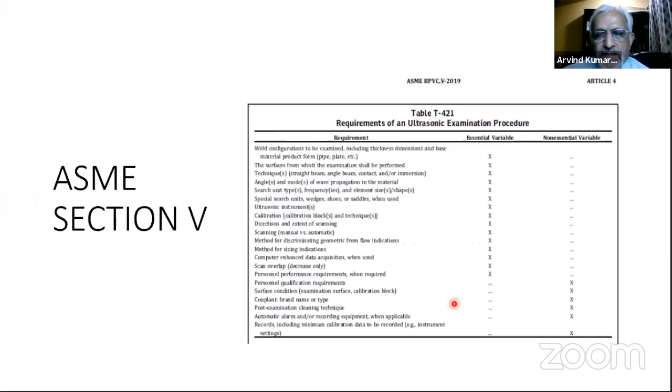So this is not clear. That's why I have added what points are to be considered important. Oh, that is missed out in this. I don't see it... yeah, it is there.

So here, what is important is the thickness, and what is the configuration of my joint. The weld could be a T joint, a corner joint, or a TKY type of joint. The weld configuration is important.

For each configuration, you need to have a proper scan plan available to ensure from where I'm keeping the probe and from where I'm getting the indication, whether all those things are proper or not. Type of instrument, whether it is able to pick up and in workable condition. Search unit type, that is the probe, 60 degrees or 70 degrees, which I'm using.

Speed of scanning: the code allows up to 150 mm per second, 6 inches per second. You should not go beyond that, but generally we follow much below this. Technique, whether you are using straight beam or angle beam.

Calibration block and sensitivity. Again, for guidance, you can look at ASME Section 5, Article 4, which gives a table, T434, mentioning different thicknesses and what size of hole you can use for picking up your sensitivity.

Direction and extent of scanning. Sometimes there are limitations with respect to extent of scanning, which should be reported in the report you get, so that you know where things were not able to be detected and what actions you have to take. You should be aware of that.

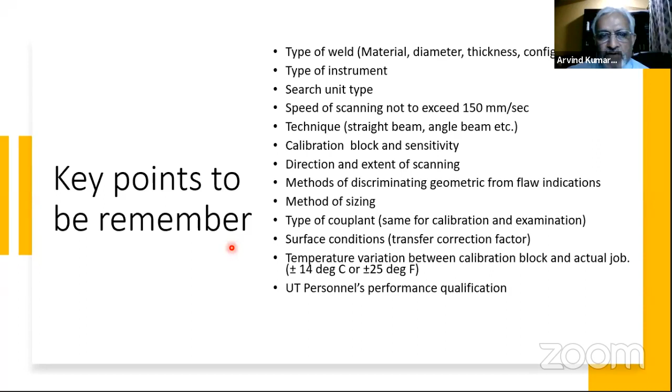With this, I think I've covered all 4 techniques and the important basic principles, giving you just time to refresh. Now, what the code talks about is procedure validation.

This is very widely used in the industry, and I would suggest that in the marine industry also people are aware and adopt these good practices to ensure the job is performed appropriately. The code, in the para I mentioned here - T150 of Article 1 - says that procedures should be validated.

That means I have a documented procedure approved by an NDT level 3, which is supposed to work. When I do the job the first time, I make sure the parameters given in the procedure are really working and able to pick up the defect which is supposed to be picked up. That is procedure validation.

It means demonstrating that a procedure is working well, like qualifying a welding procedure. The purpose is the same - that when doing production welding in the field, it meets your requirement. That is why you do a procedure qualification for welding. Same way for NDT, there is a procedure qualification which needs to be done once.

Subsequently, you have to make sure each time you follow the same procedure. There are essential variables, which I mentioned in one of the slides on section 5 requirements - essential and non-essential - and if we vary an essential requirement, then you have to demonstrate the procedure once again.

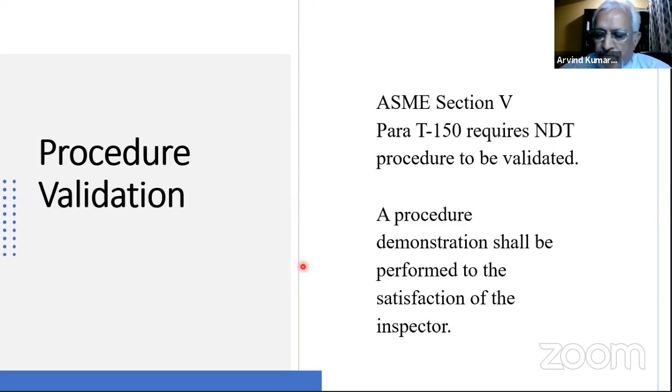So validation means seeing the competency of the person carrying out the test - automatically he gets approved. Then the machine used for the test is checked and accepted. And the procedure, which is already supposed to be previously approved before they do the qualification test, is a proper procedure approved by a competent level 3.

Don't go by only the certificates - even a level 3 certificate. I can give an example from my previous company, where we were regularly short of level 3s and conducted interviews. Out of 10 interviews we conduct for a level 3, only 1 will pass, even though they hold the level 3 certificate.

Nowadays, college students, as soon as they pass, know the importance of this certification. They take 2 months off, study, sit the exam, and get the certificate, but they don't have knowledge about practical exposure and such things. So they are not able to perform well in the field. This is the importance I have seen practically.

Out of 10 level 3s we used to interview, our requirement was for every project to have a level 3. So out of 10, we used to get sometimes only 1, and sometimes we had to compromise - saying okay, he's somewhat good, let him come, and we will take care of the rest of the things where he's lacking.

Now, lastly, before I end, I wanted to mention a few things about the certification schemes available, and what is widely used - many of you must be having level 2 certifications. This is, I would say, the most incorrectly interpreted scheme and certification widely available, not only in India but elsewhere also in UAE, which is misused - the one shown at the bottom, ASNT, SNT-TC-1A.